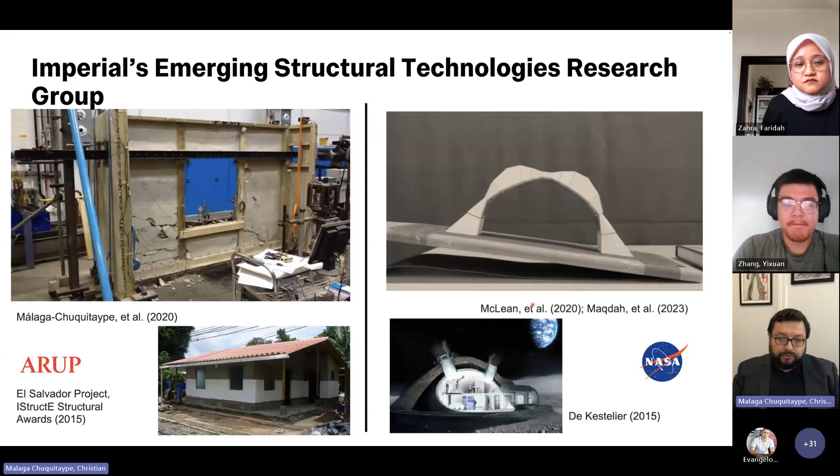And this project went on to win a sustainability award from the IStructE. On the right-hand side here, you can see some of the more recent work we have done in collaboration with Greenwich and NASA, trying to provide optimal solutions for the shielding structures that will be protecting some extraterrestrial assets. We used a number of AI techniques to do that, and subject those models to Marsquakes and moonquakes and things like that.

But throughout our research, we do, apart from the experiments, quite a lot of modeling, notably in steel and timber, but also in other materials. We cover different structural responses, a diversity of structures, bridges, buildings, and so on, different scales from the macro to the micro, from whole structural systems to the interaction between bolts and joints, incorporating blast, fire sometimes, and other forms of extreme loads. Detailed continuum models and also some form of stick frame models of systems.

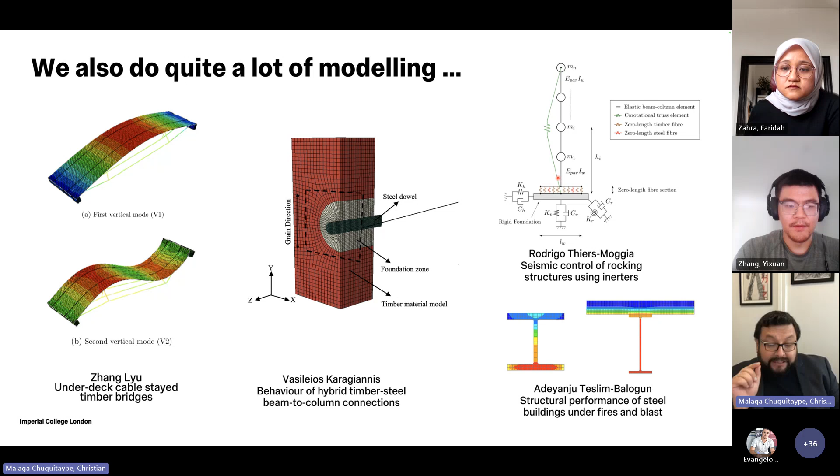Now, modeling is an interesting beast in itself. It has been said by a statistician, and I'm sure many of you have heard this before, that all models are wrong, but some are useful. What that really means is that the ability to set up an analytical or numerical model that can capture the important aspects of the behavior we need to capture to answer a particular question is really the key in all this process of modeling.

So today you will be hearing from two different modeling approaches. First you will hear from Faridah about her work on the provision of hazard-consistent comparisons for performance-based assessment of steel moment frames, where she's trying to answer the question of how much the disregard for the causal relationship that exists between the intensity of the earthquake and the properties, the characteristics of the ground motion, how much that affects our estimates and our predictions.

And then you will hear from Yixuan on the challenges of modeling structures that have a strong nonlinear response, and some of his attempts to model a particular new type of device called the inerter and the clutch inerter in this particular case, through a framework that I think has a great potential to get us a bit closer to the truth in these non-smooth dynamics problems. So without further ado, I will let Faridah start speaking and presenting.

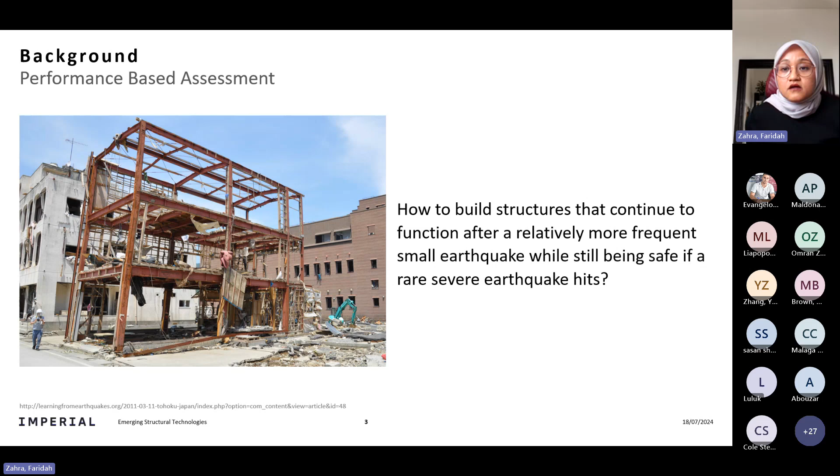This question can be answered through probabilistic seismic demand analysis within a seismic performance assessment framework that is widely known as PBEE. Intuitively, a performance assessment of a structure needs to be based on the hazard at the selected site. However, surprisingly, the available studies on seismic performance assessment were based on a hazard inconsistent assumption.

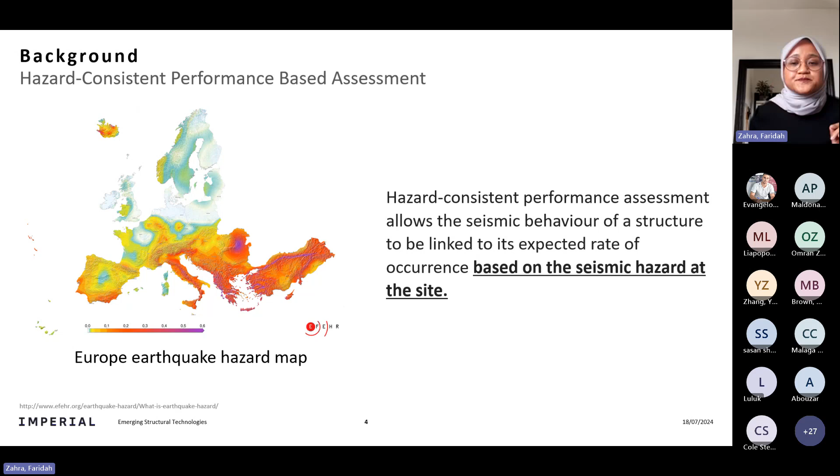So one of the main aims of the study is to stress the importance of having a hazard consistent assessment, which allows the seismic behavior of a structure to be linked to its expected rate of occurrence based on seismic hazard at the site. As mentioned, the hazard consistency in the study is secured through conditional scenario spectra, or CSS.

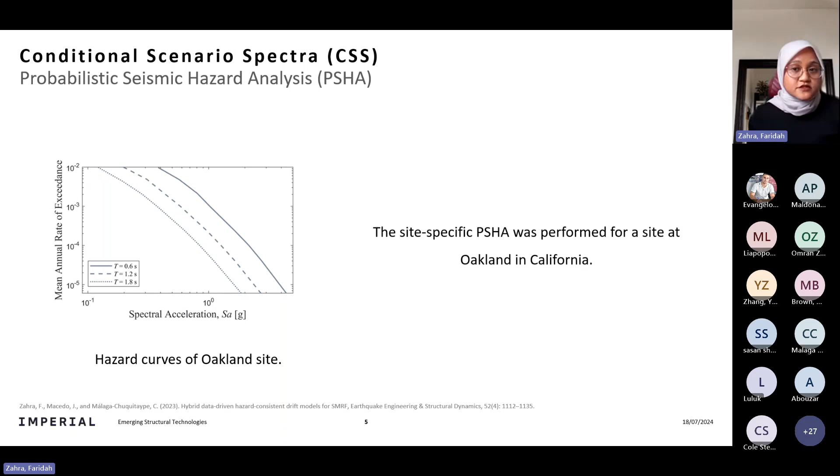The first step of CSS is representing the seismic hazard level at a site by the probabilistic seismic hazard analysis. And the study used the PSHA result of a site in Oakland, California.

In the next step, constructed from the PSHA, the UHS or uniform hazard spectrum is a commonly used target spectrum that assumes equal probabilities of exceedance of spectral acceleration at all periods. However, as this UHS is constructed from the PSHA, it constitutes a composite of all earthquakes that take part in site-specific hazard, but these earthquakes are very unlikely to occur simultaneously, so the UHS does not represent a spectrum of any single earthquake, and none of the single earthquakes is likely to produce a spectrum as high as that of the UHS over a wide range of periods.

So Baker and Cornell developed the conditional mean spectra, or CMS, as an alternative to the UHS. The CMS represents the average spectrum that would occur if the selected spectral acceleration at the reference spectral period occurs. The term conditional refers to the spectrum being anchored at the selected spectral acceleration at the conditioning period, T, and the term mean refers to the mean value of the response spectrum conditional upon the occurrence of the spectral acceleration at the conditioning period.

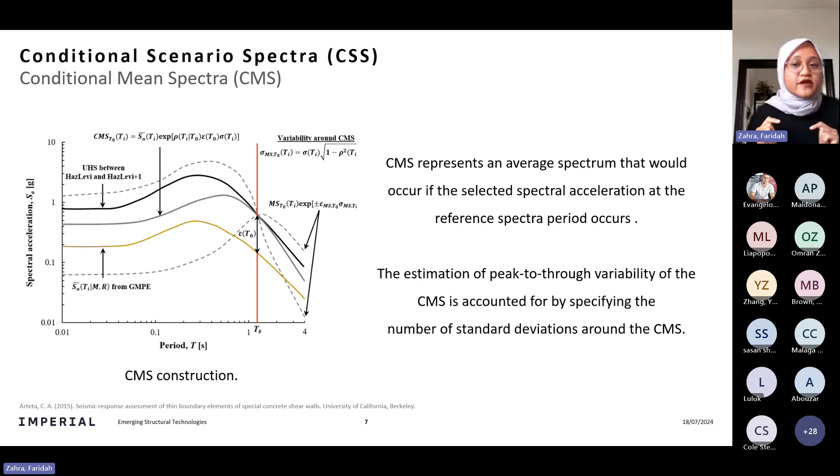The CMS per hazard level is selected from a subset of recordings from the suite of ground motions that we have, scaled to match the CMS and its variability for each hazard level. This method ensures the recordings have the correct spectral shape, accounting for the period-to-period variability of the ground motions. As a result of the CSS methodology, we have a set of realistic earthquake spectra with assigned rate of occurrence based on their spectral shape and intensity.

Based on the PSHA of the site in Oakland, this study selected 596 motion records, where each is assigned a rate of occurrence. These rates of occurrence of this set of ground motions can later reproduce the hazard at the site to prove its consistency.

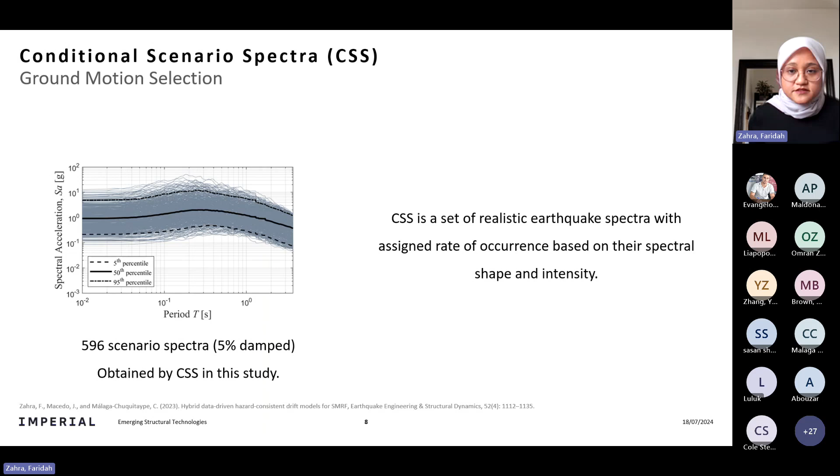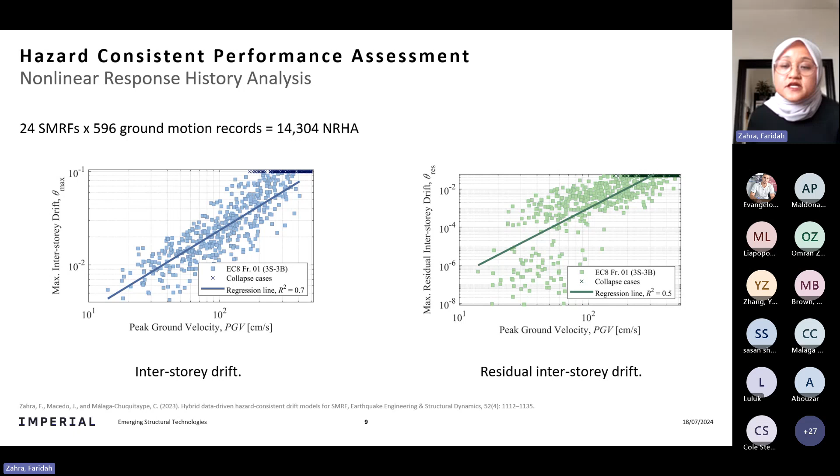As an example of a case study to show the importance of hazard consistency of the analysis, part of our study performed hazard-consistent performance assessment of 24 frames that were run with almost 600 motion records from the CSS using the high performance computing facility at Imperial College London, resulting in more than 14,000 non-linear response history analyses. We then assessed the behavior of the peak, transient, and residual interstory drift as the engineering demand parameters of interest, and also assessed the several patterns found from this response database.

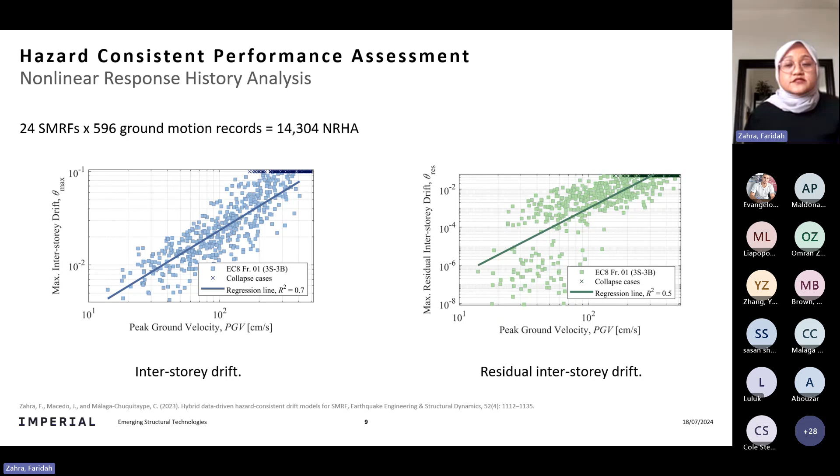We then also developed prediction models for these EDPs based on this extensive structural response database. The process of developing the model and the model itself has been published in a paper as presented here.

An interstory drift prediction model was developed in the study from the structural response database from the NRHA. It was preceded by feature selection with several machine learning algorithms to select the best predictor from the structural and seismic parameters that we have. Then multilinear regression was carried out to develop the model.

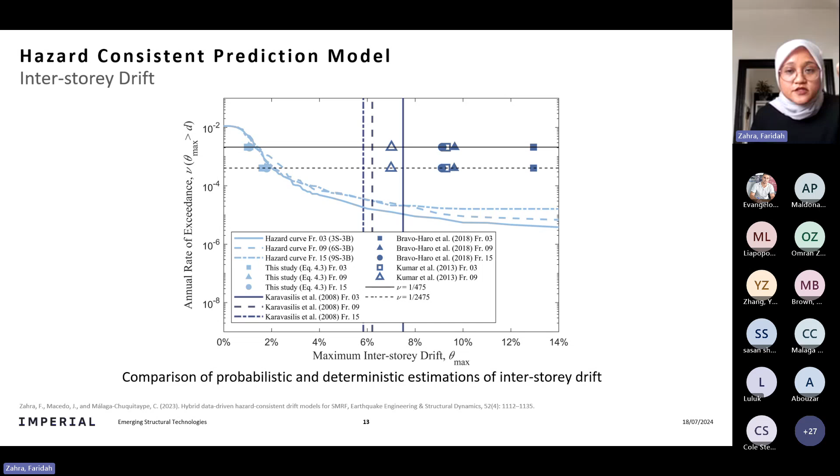In another paper, we also assessed the residual drift demand, which is arguably more important than the peak transient interstory drift demand, as it is actually the structural response that is more practical to measure in a post-earthquake assessment. We also developed the hazard-consistent prediction model of residual drift.

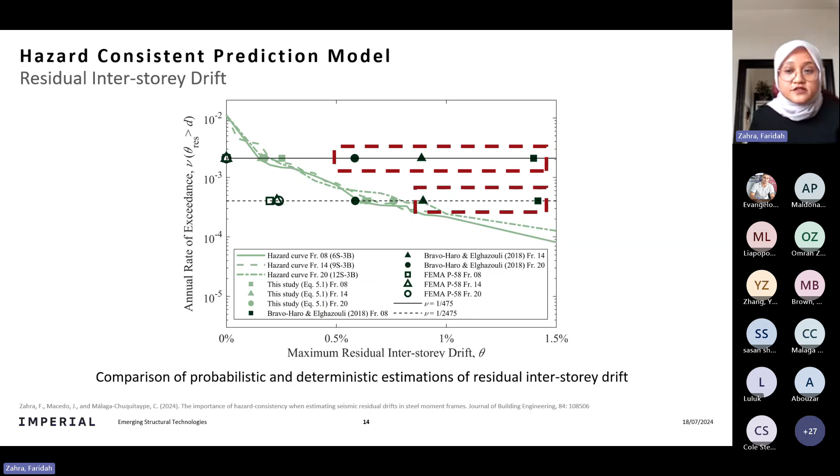As before, the assessment is presented in the form of a hazard curve, and our model is shown to match the actual demand of the frame well and is able to discern different hazard levels. The available non-hazard-consistent demand from FEMA P58, on the other hand, severely underestimates the residual drift demand, and the model from available studies was found to overestimate it. These available studies also cannot distinguish different hazard levels.

While those studies are mentioned shortly, just to show the importance of hazard consistency in the performance assessment of structures, this presentation will focus more on a hazard consistent point of view of available seismic codes.

In the context of steel frames design, available seismic codes require these frames to respect certain maximum transient deformation levels, in addition to having a certain lateral strength under seismic loads. These criteria are prescribed differently in different codes.

A number of differences are found between the current Eurocode 8, which from this point will be referred to as EC8-05, and the revised draft of Eurocode 8 referred to as EC8-23, and the American Seismic Code ASCE 7.

One part of my thesis evaluates the seismic design rules in the current and revised draft of European and American seismic codes within the hazard consistent performance assessment framework, answering the question: will a building at a certain site designed with different seismic codes result in similar structural performance, and will the seismic codes yield well-controlled structural design for all structures for a certain hazard level of a site?

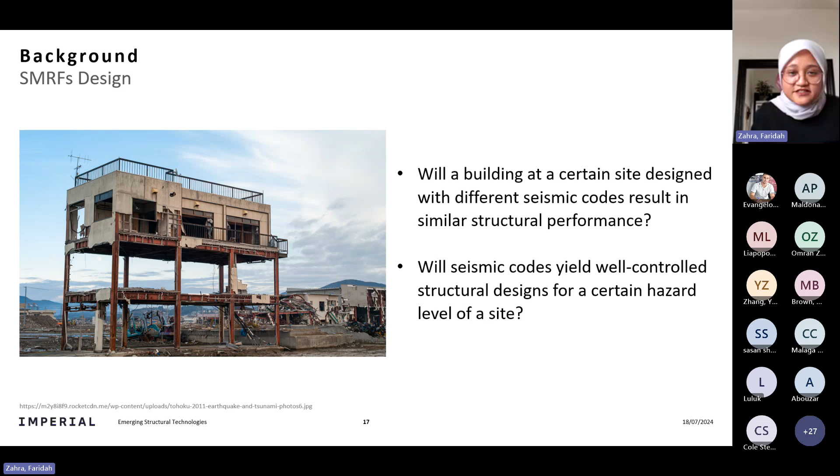Several key differences are found between the design codes and their comparisons, but due to time constraints I won't explain them in detail. The key differences highlighted in this study are their elastic and design seismic spectra, the inter-story drift limits, the capacity design rules, and the second order effects.

Next, we designed a number of frames with each seismic code. First, we designed the frames using a group of elastic spectra for the current Eurocode, the revised Eurocode 8, and ASCE 7, constructed so that they match as closely as possible to the Oakland spectrum from the UHS at 500 year return period, for the range of structural period of interest.

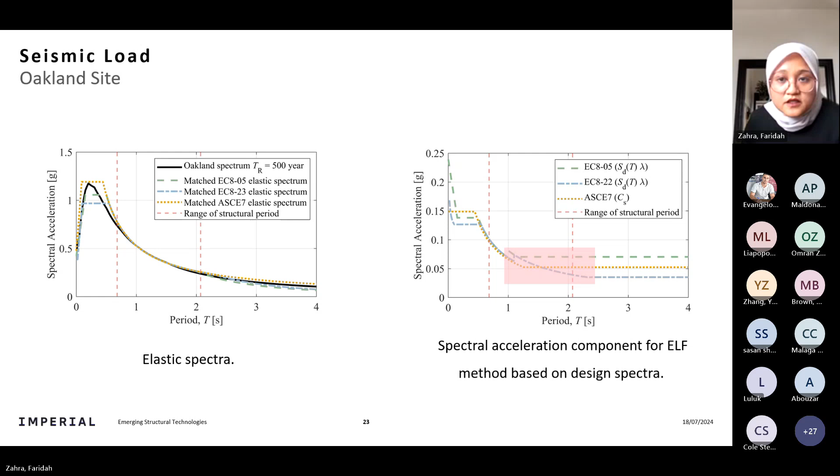Based on the seismic shear, three families of frames are designed according to the current Eurocode, the revised Eurocode 8, and ASCE 7, with different numbers of stories and different numbers of bays. 16 frames are designed for each code, resulting in 48 frames overall.

These frames were designed with the help of a tool called Automated Seismic Design and Analysis, or AutoSDA, developed by Xingquan Guan and Professor Burton from University of California for ASCE 7-based frame design. This Python-based framework was modified in the study to incorporate the European rules.

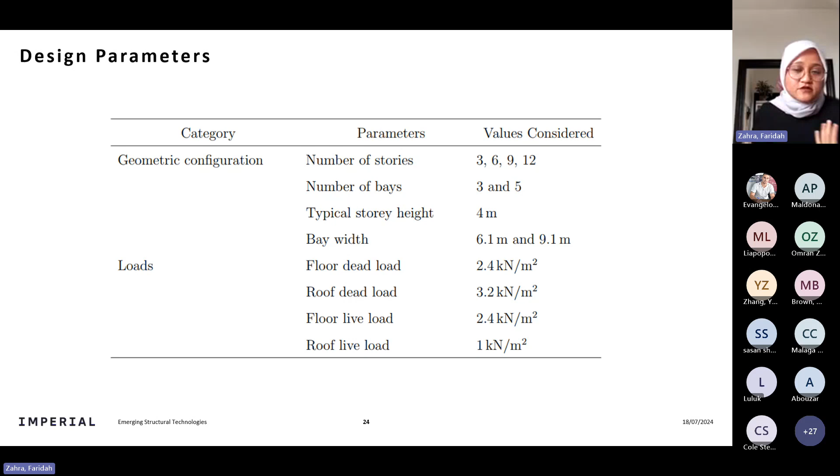AutoSDA is a Python-based platform that automates seismic design. It works by trying the biggest possible fill section for the frames and reducing those sections until they are optimized as small as possible, based on satisfaction of relevant design constraints and also constructability constraints.

As expected from steel frames, all designs are governed by the drift. Here is presented the weight of the frames normalized against the weight of the current Eurocode frames for all 48 frames. Overall, the weight of the frames based on the revised Eurocode is slightly reduced from the current Eurocode, shown here with the blue bars.

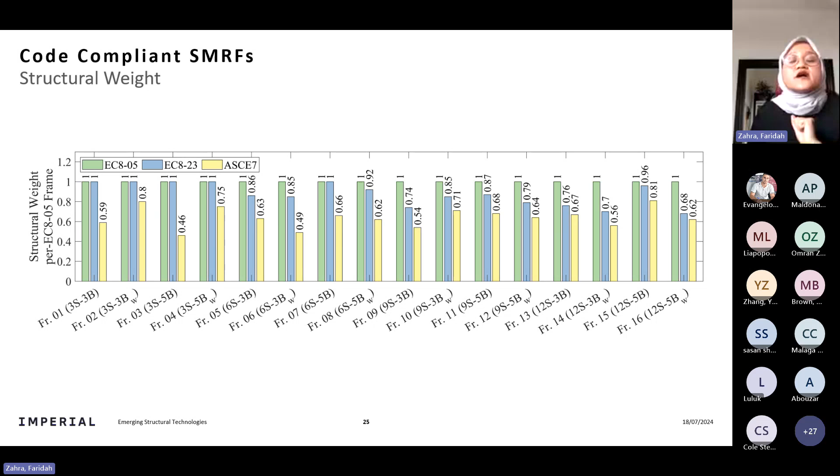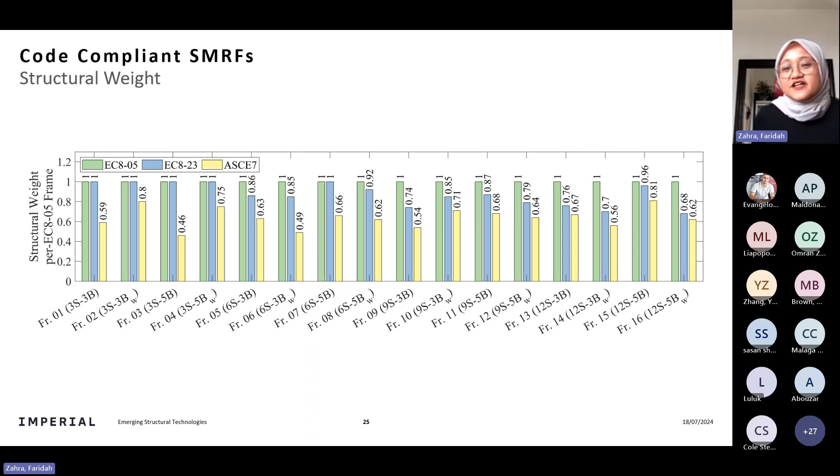The ASCE frames, on the other hand, result in the lightest frames, down to 46% of the weight of the current Eurocode frames, due to the lax strength and drift limit in ASCE 7.

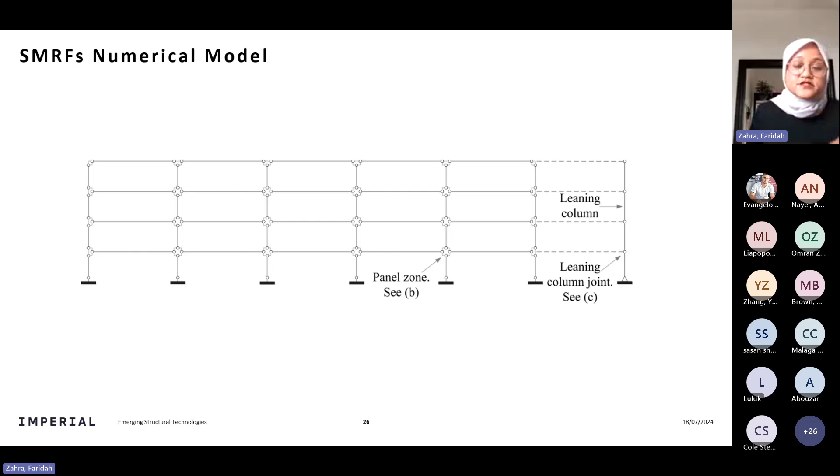All frames were modeled and analyzed in OpenSees. The frames were modeled following a concentrated plasticity approach, with elastic beam column elements connected by a rotational spring representing the potential plastic hinges at the beam column connection. The panel zone here shows the detail of the spring model adopted, which follows the bilinear hysteretic response based on the modified Ibarra-Medina-Krawinkler deterioration model.

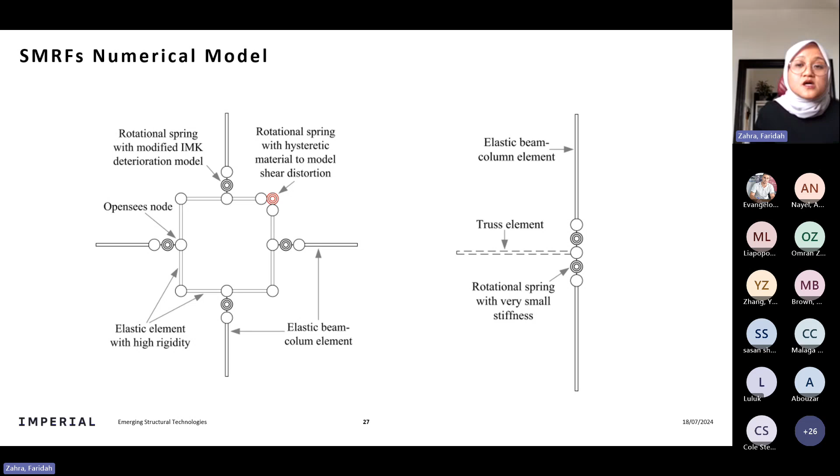As an example, here is the illustrative hazard curve of two frames designed with different seismic codes. It can be seen that both frames hold the same pattern, where the current Eurocode frames have the lowest interstory demand, followed by the revised Eurocode 8, and then the American frames experience the highest demand.

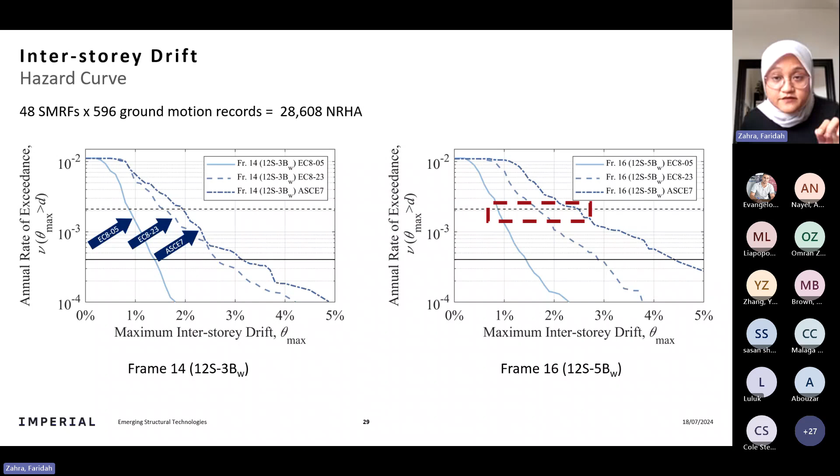From this hazard curve, the associated maximum interstory drift at the life safety performance level and the collapse prevention performance level for each frame are collected to be compared. These values in this bar chart are the corresponding interstory drift demand of each frame. For example, here is frame 1 designed by the current Eurocode, revised Eurocode, and American codes for the life safety performance level. We also obtain the corresponding demand for the collapse prevention performance level for all frames.

Presented here as well in this chart is a horizontal line marking the maximum drift limit for each performance level based on FEMA P58, which is 2.5% for the life safety performance level and 5% for the collapse prevention performance level. All frames here are shown to be safely within the prescribed limits.

However, one thing that can be seen from this graph is that both European and American codes are found to be unable to ensure a consistent demand at both performance levels. For example, the current Eurocode shows that the interstory drift demand varies between 1.3% to 2.2%. And the ASCE 7 has the most inconsistent demand, between 1.9% to 4.6%, at the collapse prevention performance level.

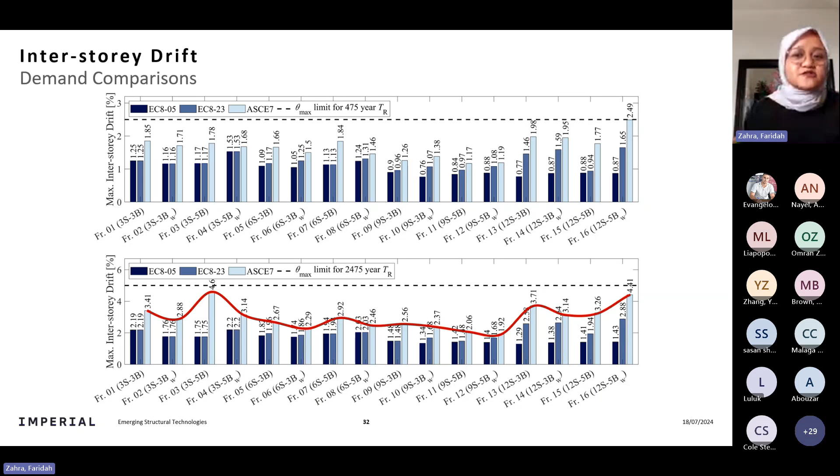It is to be noted that it is desirable that code-compliant design will result in well-controlled responses, where similar demands are expected at a certain performance level on all structures, depending mainly on the function they're designed for, keeping all things being equal.

To compare between each code, it can be clearly seen that the current Eurocode takes a very conservative side, where the average interstory drift demand at life safety performance level is only 1%, which is 40% of the limit. At the collapse prevention performance level, the average demand of the current Eurocode is 1.7%, which is 34% of the limit.

For the revised Eurocode, although the design rules have undergone many changes from the current Eurocode 8, the ensuing designs are still conservative. The average interstory drift demand for the life safety performance level is found to be 1.2%, and 2% for the collapse prevention performance level. These demands are very close to those of the current Eurocode 8, although there are some considerable differences in taller frames.

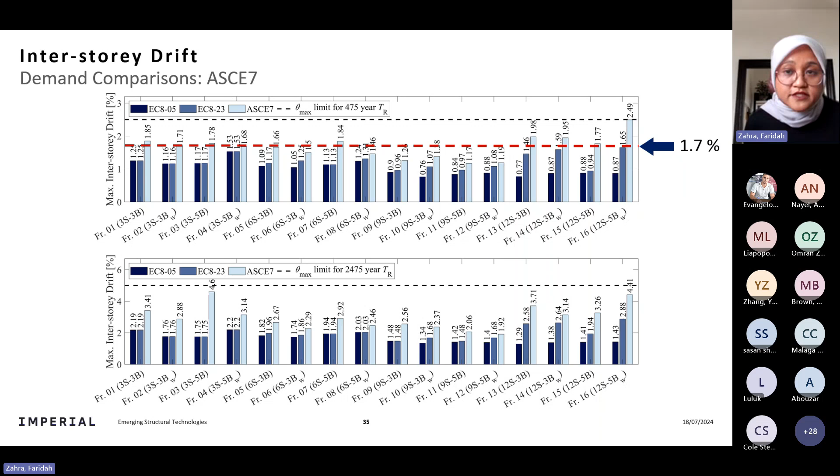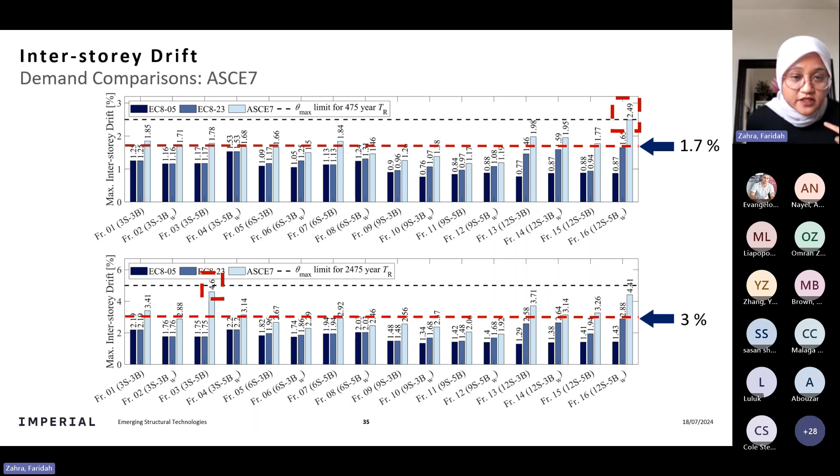On the other hand, the American frames have the most optimum design, where the average interstory demand at the life safety performance level is 1.7%, which is 70% of the limit, with frame 16, 12 stories, reaching the exact limit at 2.49%. At the collapse prevention performance level, the average interstory drift demand of American frames is 3%, which is 60% of the limit, with the highest being frame 3, with 3 stories, at 4.6%.

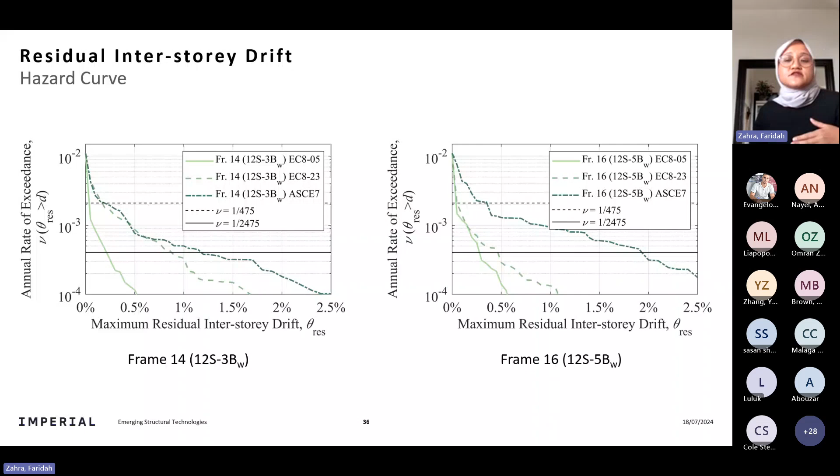We also assess the residual drift demand for all frames. Presented here, as before, is the hazard curve of several frames designed with different seismic codes. Similarly with the interstory drift demand case, it can be seen that the current Eurocode has the lowest residual drift demand, followed by the revised Eurocode and the ASCE 7.

From the perspective of design rules consistency, the ASCE 7 shows the largest variability in demands, where the residual drift demand of the frame can be as low as 0.26% and up to 2.4% at this collapse prevention performance level.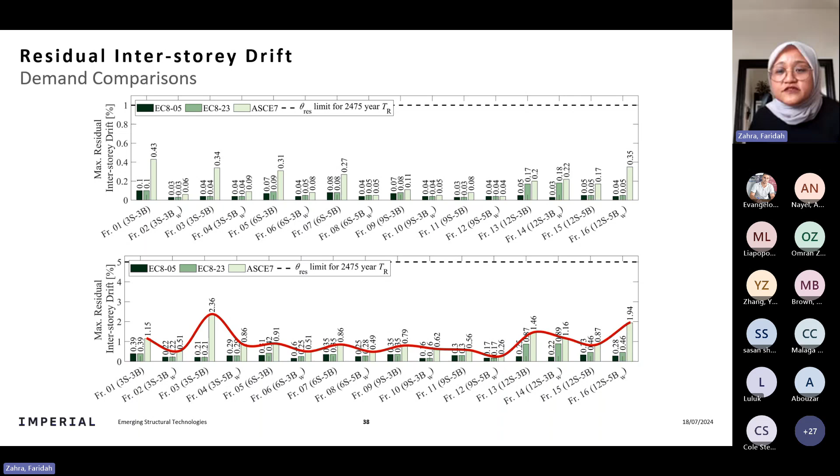On the other hand, the current Eurocode and the revised Eurocode consistently show very low residual drift demand, denoting conservative design. The cautiousness of the current Eurocode design is shown by its very low residual drift demand, only up to 0.4% at the last performance level, and the revised Eurocode demands virtually the same as the current one in frames up to 9 stories.

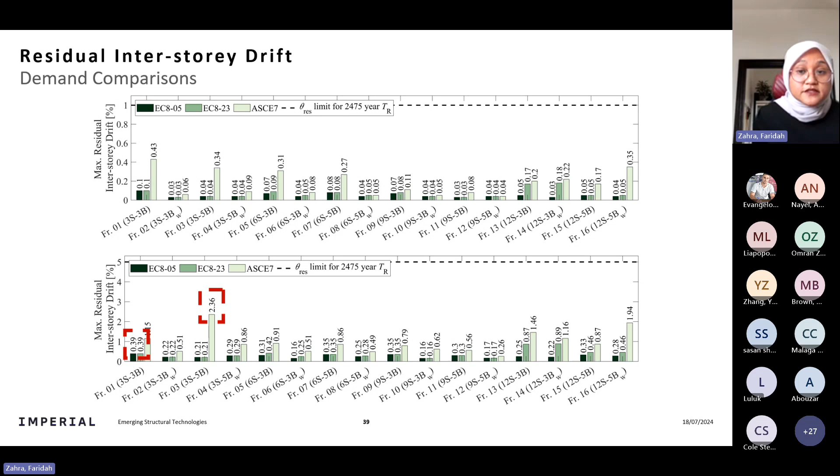Noting once more that the changes in the revision of Eurocode 8 do not lead to significant changes in the expected structural performance. The American frames, on the other hand, still have the highest demand, at almost half of the limit here for frame 3, which is 3 stories.

So in conclusion, from the first part of the presentation, we show that hazard consistency is essential to obtain meaningful results from our seismic analysis, and not considering the causal relationship between the intensity of the motion and its characteristics can lead to a severe misrepresentation of the actual seismic response.

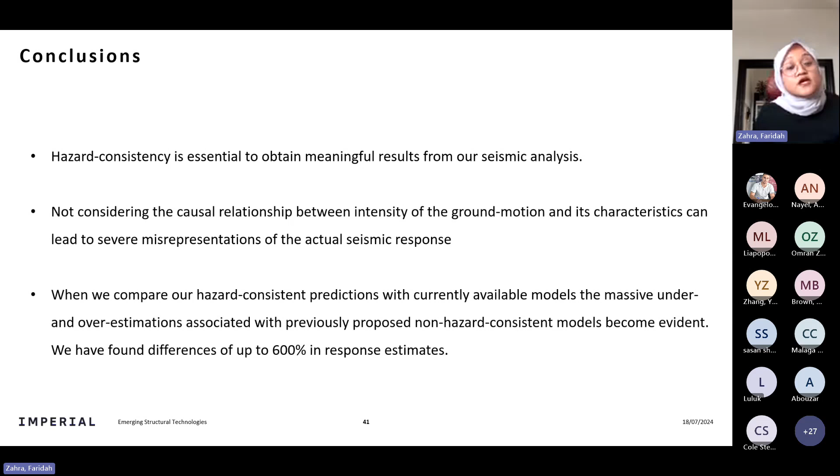When we compare our hazard consistent prediction with currently available models, the massive under- and overestimation associated with previously proposed non-hazard-consistent models become evident. We have found differences of up to 600% in response estimates.

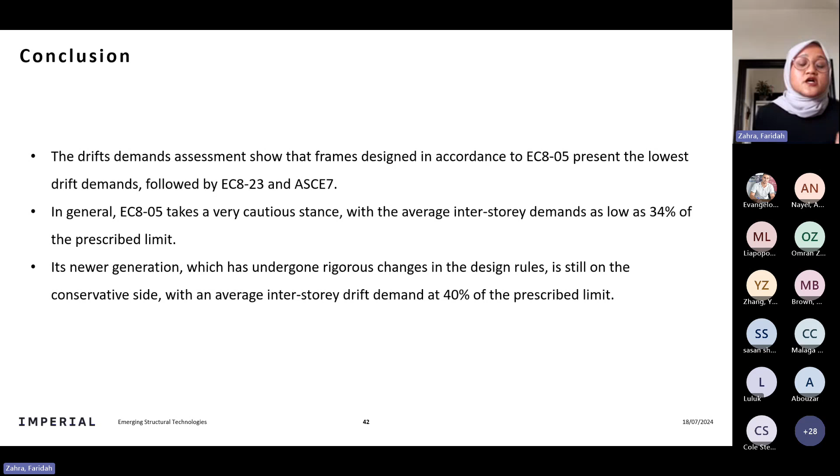From the seismic code comparisons, we found that the drift demand assessment showed that frames designed in accordance with the current Eurocode 8 present the lowest drift demand, followed by the revised Eurocode 8 and ASCE 7. In general, the current Eurocode 8 takes a very cautious stance, with the average inter-story demand as low as 34% of the prescribed limit, and its newer generation, which has undergone rigorous changes in the design rules, is still on the conservative side, with an average inter-story demand at 40% of the prescribed limit.

The American code, on the other hand, results in the most optimum design, where the average inter-story demands are 70% for the life safety performance level and 60% for the collapse prevention performance level. One thing to be noted as well here is that when contrasted with our EDP hazard curves, our results highlight the inability of all mentioned seismic codes here to control structural response, leading to similar structural demands for all structures regardless of their function and how they were designed at a certain return period.

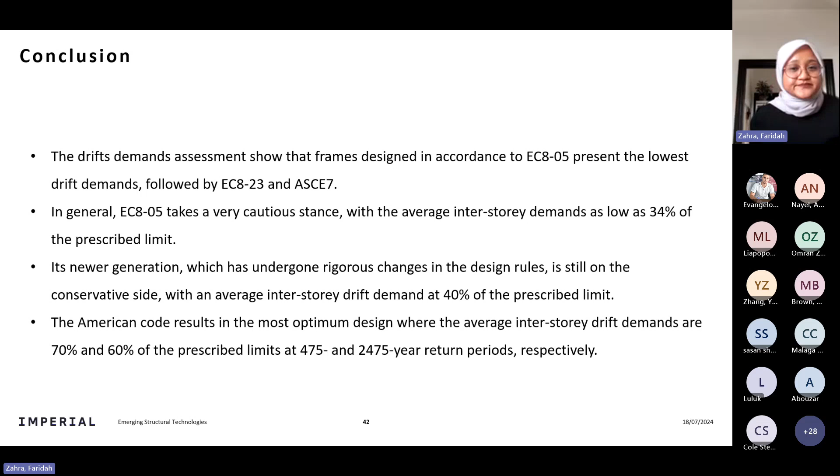Okay, that's all. Thank you very much.

I will listen here to Christian then. Yeah, maybe Yixuan, can you start? Thank you, Faridah. Hello. Hello. Okay. Shall we start? Yes. Yeah.

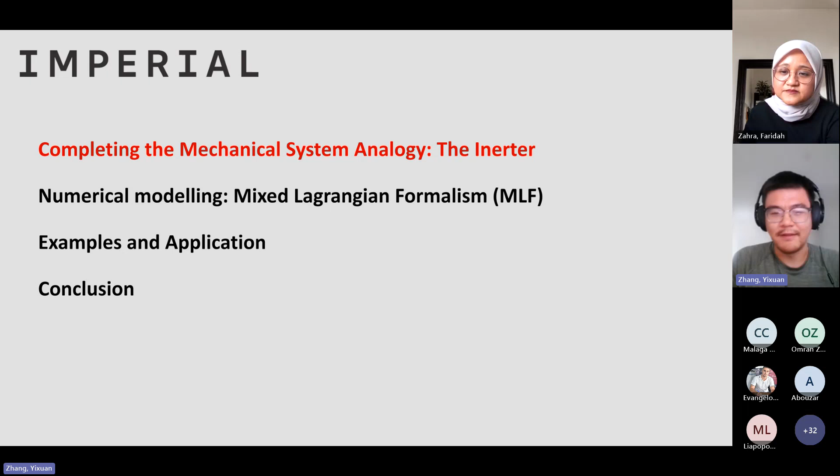Hi everyone, I'm Yixuan, a second-year PhD student from Imperial College, and I will talk about modeling structures with clutch inerter devices. My presentation will be divided into 4 parts. First, I will introduce the inerters and the numerical modeling techniques, and the numerical model is then demonstrated by examples and its applications on a rocking structure. The last part is the conclusion.

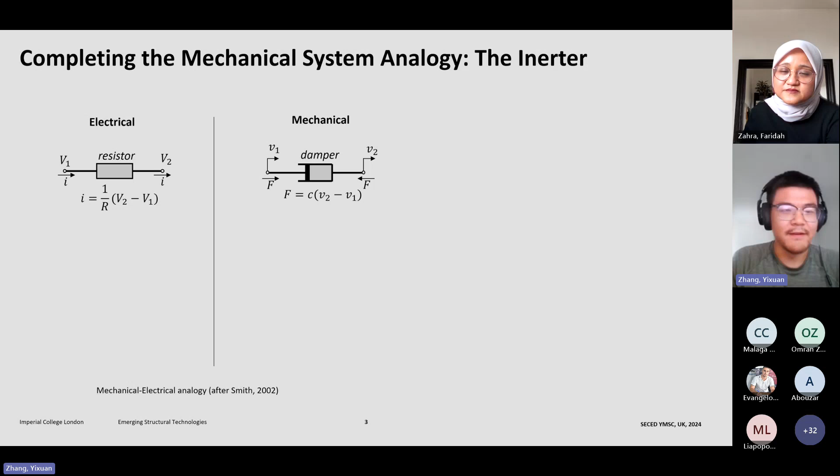Let's start with an analogy between mechanical systems and electric circuits, since they share the same differential equation. In this analogy, the damper is equivalent to a resistor; correspondingly, in practice, we have velocity-based devices like viscous dampers. The spring is equivalent to an inductor, and we also have displacement-based devices like yielding plates or frictional dissipators. And how about the capacitor? It refers to the inertia term of the equation. Is it equivalent to gravity mass? No, a mass has only one terminal. The real equivalent is the inerter, a novel device that can output force proportional to the relative acceleration of its two terminals.

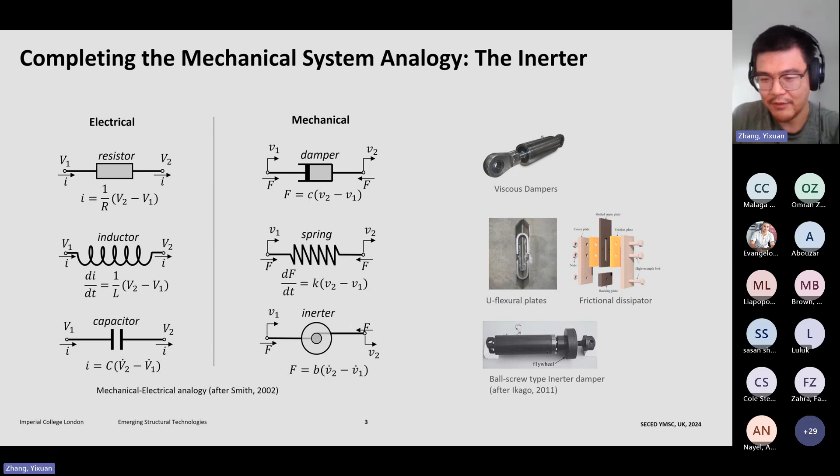The name and concept of the inerter was initially proposed by Smith in 2002. After that, in 2005, it was introduced into Formula One racing by the McLaren team, where it is well known by the public as the J-damper. Unfortunately, due to its extraordinary performance, the use of inerters was banned in the game 2 years ago.

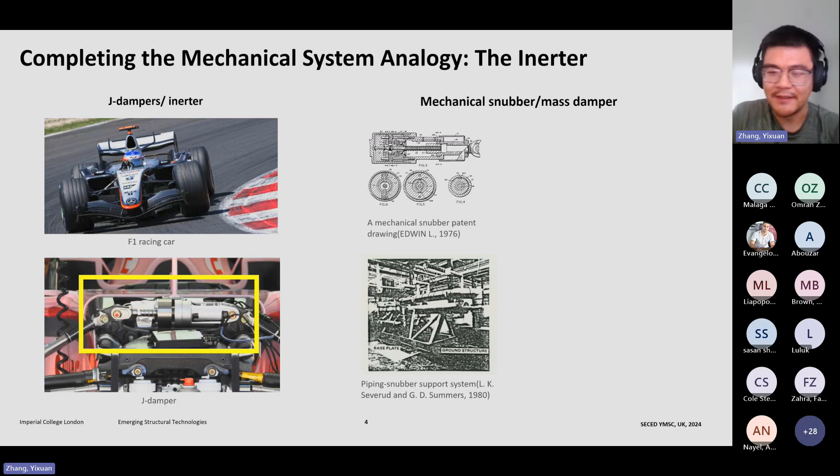However, earlier in the 1970s, similar devices were already proposed and applied for protecting piping systems against impact in nuclear plant facilities, under a different name called snubbers. The first prototype of the inerter in the civil engineering field was designed and tested by Arakaki in 1999, and until now, the real application of inerters in seismic control is still limited. One well-known example is the tuned viscous mass damper used in a commercial building in Japan.

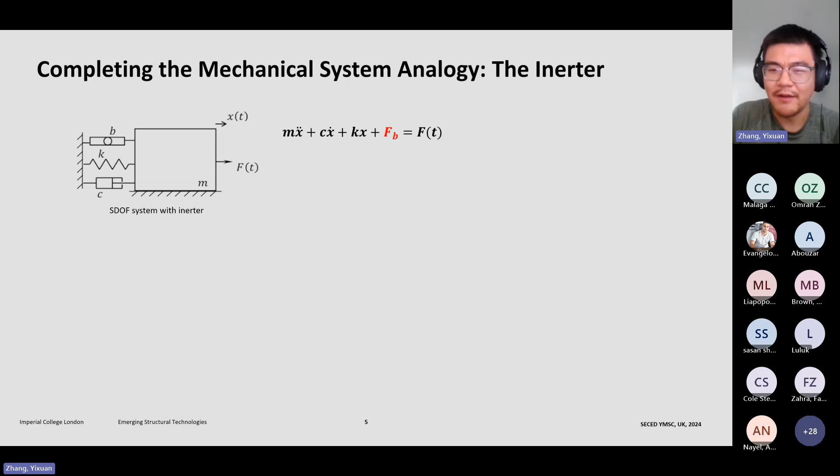So how does it work? In a single-degree-of-freedom system, we have its governing equation with an additional term for the force from the inerter. According to the definition, the force is proportional to the relative acceleration, and the coefficient is called the inertance of the inerter. If we rearrange the equation, we find that the inerter directly modifies the mass term of the equation of motion. And how does the inertance come from?

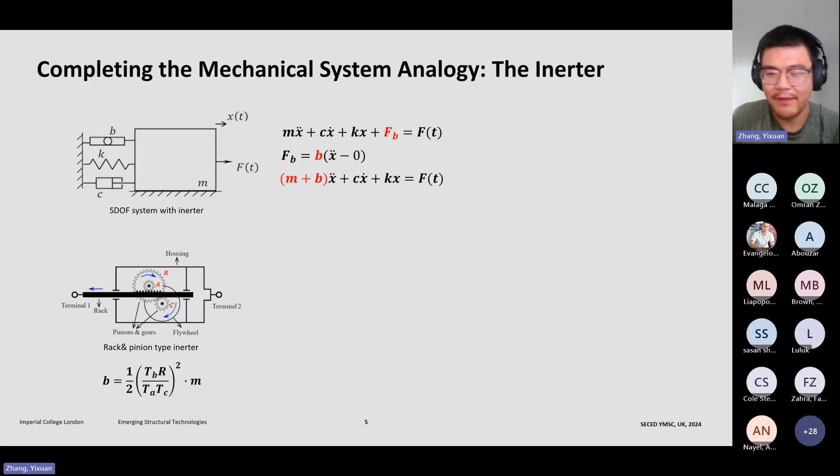Usually, for mechanical inerters, the translational movement is converted into a rotation of a flywheel, just like here, the rack and pinion type inerter and ball screw type inerter. So the translational movement will be converted into a rotation of a flywheel inside these kind of devices.

Take a ball screw type inerter as an example. If we have a flywheel with radius of 10 centimeters and the ball screw lead of 1 centimeter, then the inertance will be 1,000 times its self-weight, which means you get additional force without increasing the self-weight of the structure.

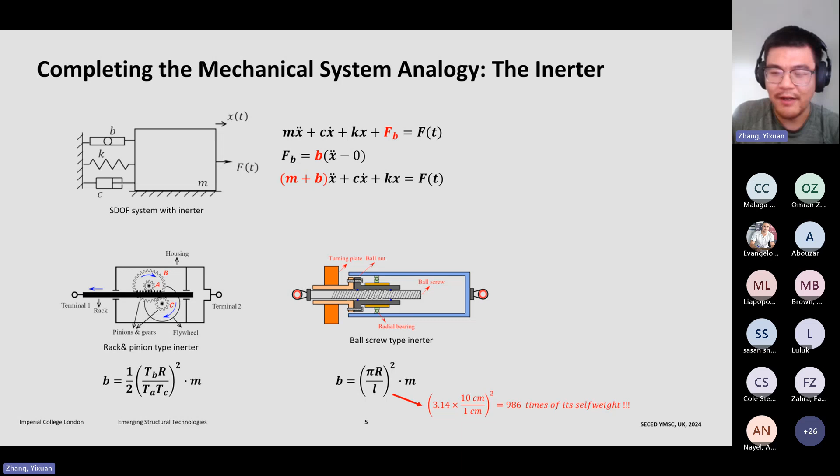So it's way more efficient than the tuned mass damper.

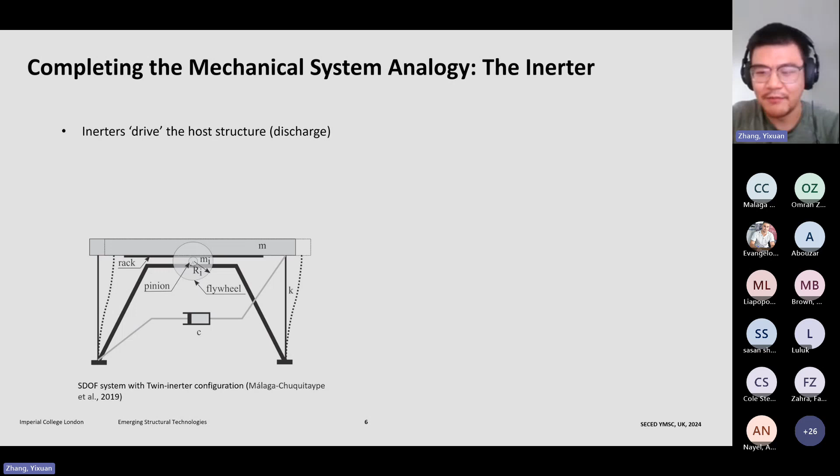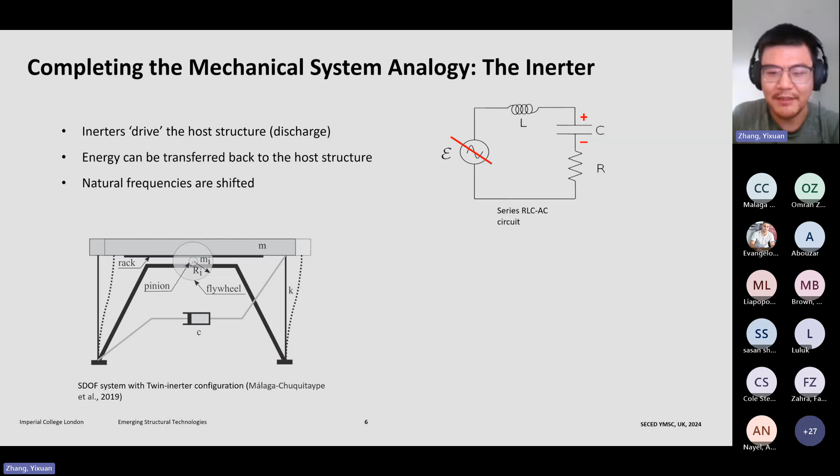But there are drawbacks of pure inerters. Many studies revealed that the inerters can drive the structure as a power output, like a discharging capacitor. The inerter can only be effective when connecting to other energy dissipating devices like dampers. Furthermore, because it directly enhances the mass matrix, the natural frequency of the structure will be significantly shifted.

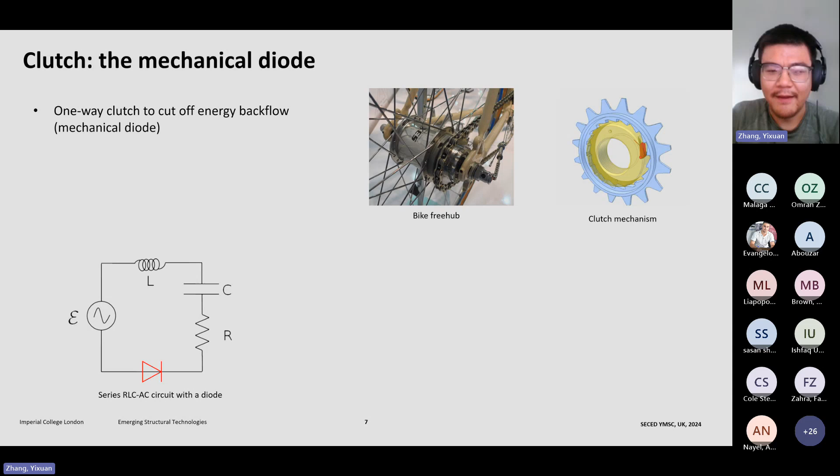Therefore, a clutch is introduced to allow the inerter to disengage with the structure. The clutch is passively working, just like a mechanism in a bike free hub or a diode in an electric circuit. It will cut off the energy backflow. And it has been proved that the structure equipped with clutch inerter has faster attenuation during the free vibration process.

And based on the one-way transmission of the energy, it is feasible to construct a flywheel-based energy harvesting system. The energy will be stored in the flywheel of the inerter.

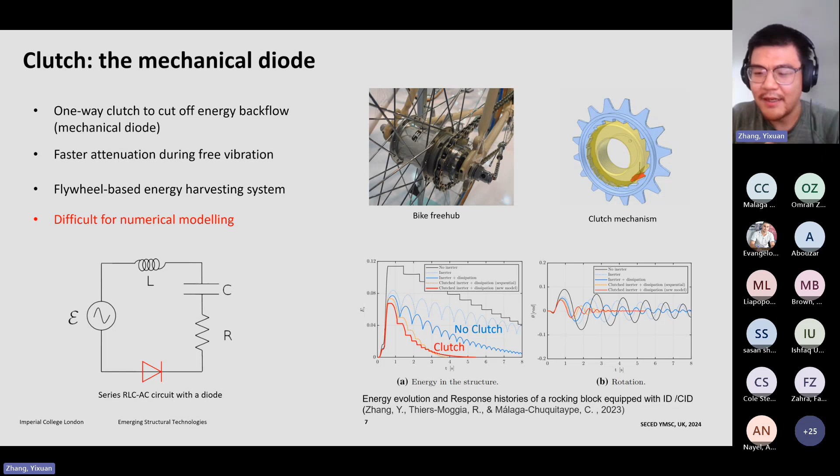However, the introduction of a clutch results in discontinuity of the system behavior, because now the system has to switch between two states, the engagement state and disengagement state, and the transition is not smooth. Regarding the numerical modeling, the numerical model needs to be able to deal with that discontinuity.

So our study is focusing on the numerical modeling of the clutch inerters. We have some existing methods, but they all have limitations.

The first one is the simplified sequential model. It is proposed when the clutch inerter is invented. In this model, the inerter is not explicitly modeled, actually. It simply assumes that the inerter disengages with the structure when the structure is decelerating, and that the inertance of the inerter becomes zero. In other words, for each new engagement after the previous disengagement, the structure engages with the inerter at zero speed.

Therefore, the assumption behind this is that the inerter will dissipate all the energy before the next engagement. It's not realistic. In case of a high-frequency structure equipped with very big inertia, this assumption means that the inertia needs to dissipate massive energy within a very short period. It greatly overestimates the dissipation of the inerter.

So we have a displacement-based contact model. It explicitly models the rotation of inertias, involving an additional set of equations and contact laws for describing the interaction between the structure and the inertia. But the problem is that the rotational displacement of the inertia monotonically increases while the structure is reciprocal. It is hard to obtain the displacement penalty contact between the two motions.

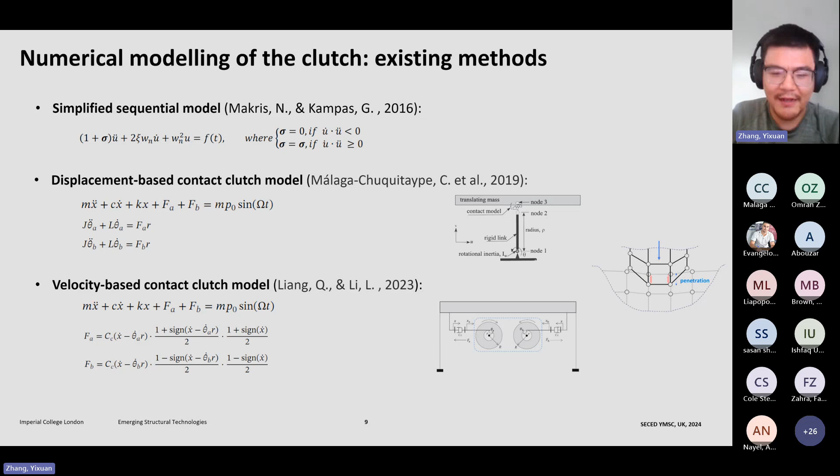Alternatively, we use mixed Lagrangian formalism, which is proved to be very robust and efficient for modeling non-smooth behavior. I'm not going to get into the mathematics of this method, but just some general features.

So MLF is a flexibility-based method. In MLF, we are going to solve two sets of equations, the equation of motion and the velocity compatibility equation. But the key is that we're not going to solve it directly. We solve the weak form of it, which is the optimization problem. And this optimization problem has a quadratic structure, which means it's convex. It's always convex, you can always find the global minimum of it. And that's how it's stable and robust.

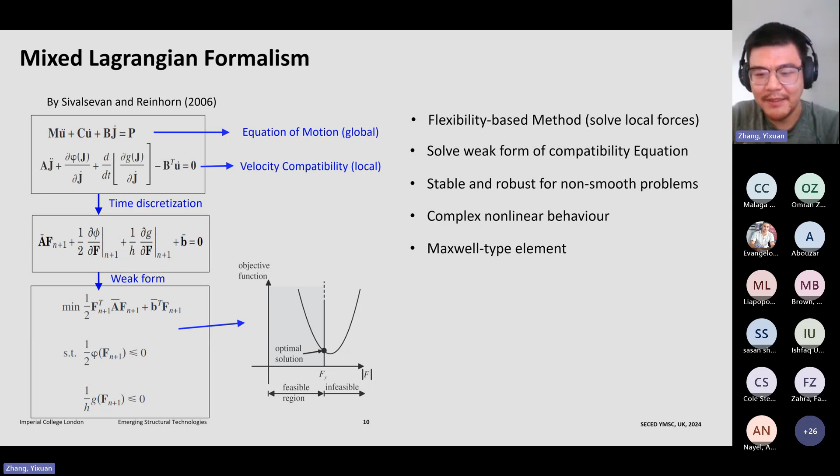And the complex nonlinear behavior can be implemented by modifying the constraints of the optimization problem. And it also uses, because it's a flexibility method, it uses a Maxwell type element, which means all the basic units are connected in series. You can model complex series behavior with only one element.

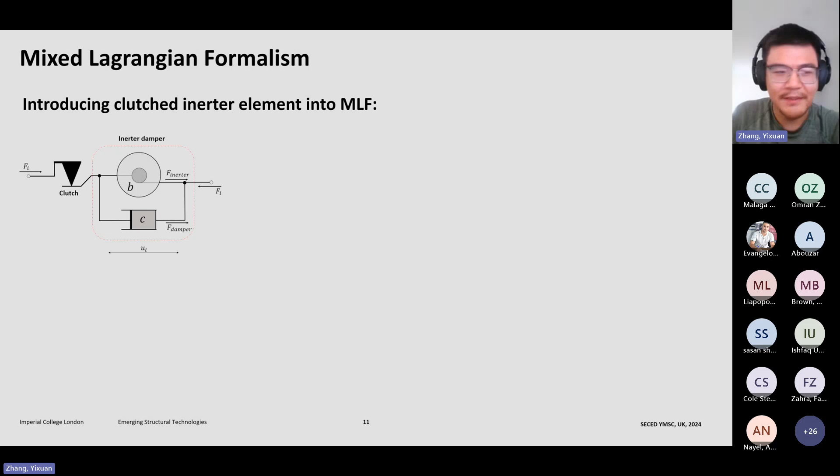So based on that, we built a clutched inerter element in the MLF framework. We start with the energy in the inerter by its definition and apply the mixed Lagrange differential with respect to both the global displacement and local force coordinates. The following expressions are obtained.

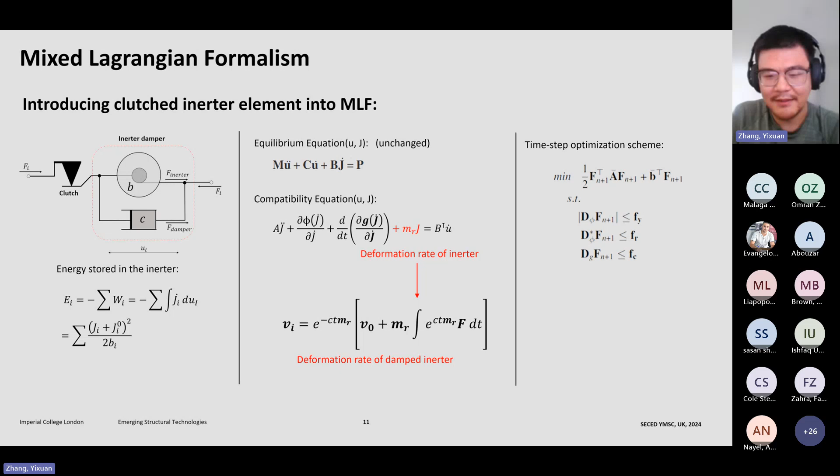And then I'll propose some examples for validation. To demonstrate our formulation, we use this single-degree-of-freedom system, and on the right is an equivalent model built in OpenSees using the penalty method for comparison.

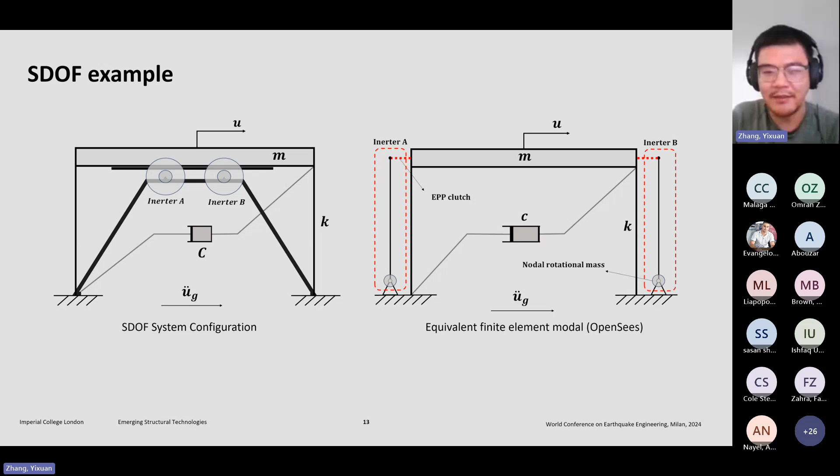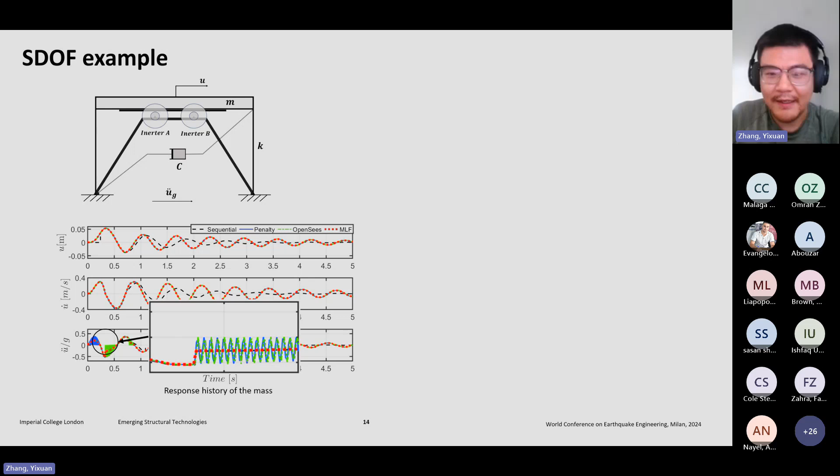And you can see in the acceleration response, all other models have significant numerical oscillation except the MLF.

And furthermore, we want to know whether the proposed model should be able to handle a larger scale system.

As we discussed, we compared the computational performance of MLF and OpenSees models through this 10-story moment resisting frame as a benchmark. This 10-story frame with lumped plasticity with ideal elastoplastic behavior and twin clutched inerters are deployed at each story. The side column accounts for the P-delta effect.

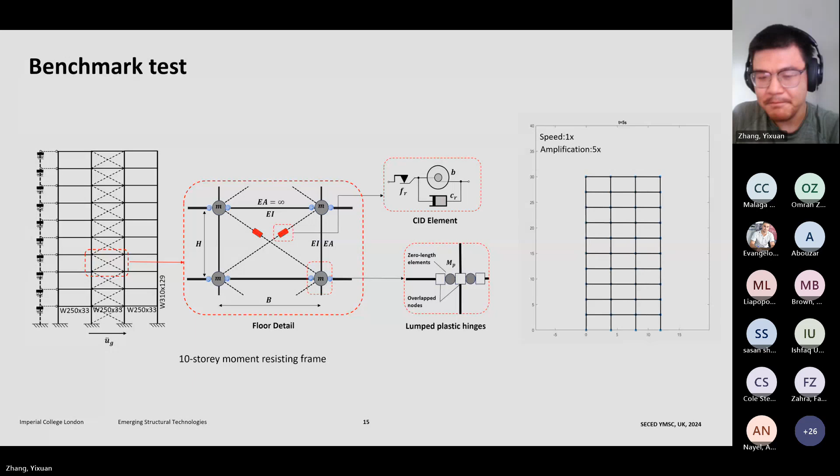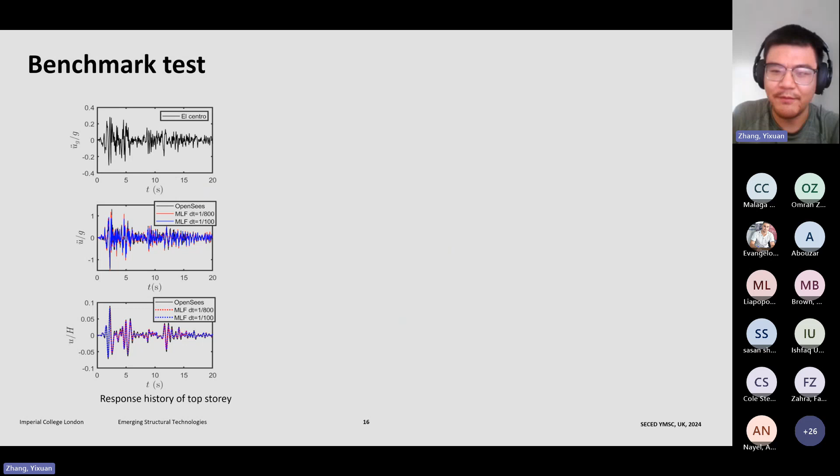And here's the response history of the top story results predicted by the OpenSees model and the MLF model. They generally agree with each other.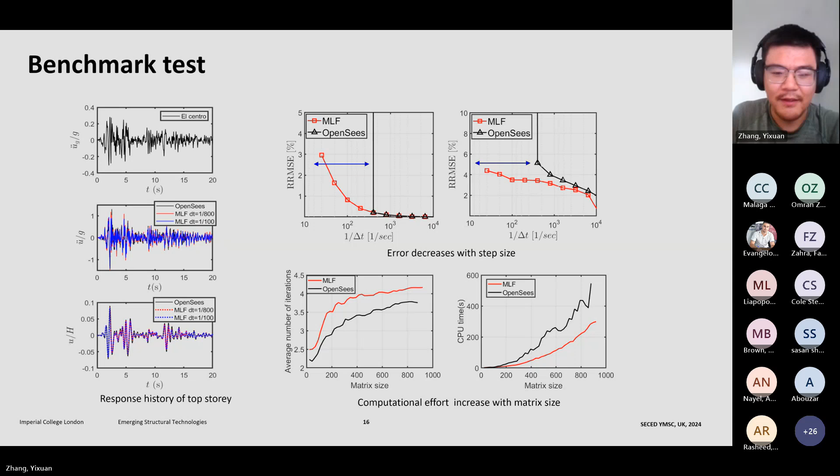And before getting to the next example, I would like to introduce rocking structures. When people talk about rocking structures, it refers to a structure whose base is not fixed to the ground, like what people did in ancient times.

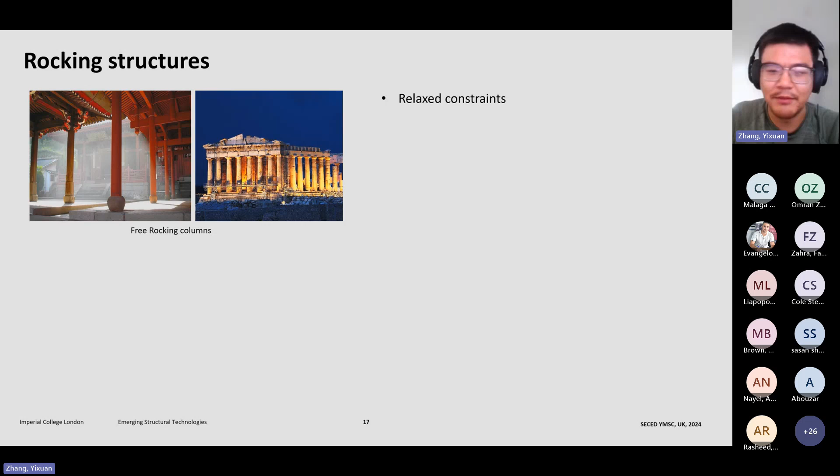Nowadays, to enhance its performance, people use post-tensioning cables to provide additional restoring force. Why are rocking structures preferred? Because it releases the moment in the structure members, leading to less residual strain or damage, as you can see in the hysteresis curve. Therefore, it has other names: damage-free structures or self-centering structures.

For low intensity earthquakes, it behaves in the same elastic way as a normal building, but in case of strong ground motion, it allows the base to uplift, and the dynamic behavior of the building will be dominated by the rocking mode, which is like a safety fuse. In this case, since the deformation is concentrated at the rocking surface, it provides a favorable location for seismic control devices like the clutched inerter.

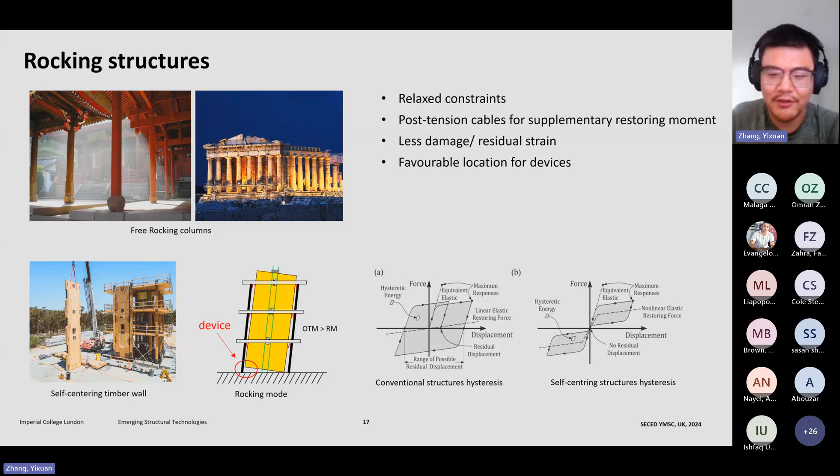The drawbacks of the rocking structures are obvious: there is a risk of overturning because it frees the base constraint. It will have larger displacement, and many research works also address the local failure problem.

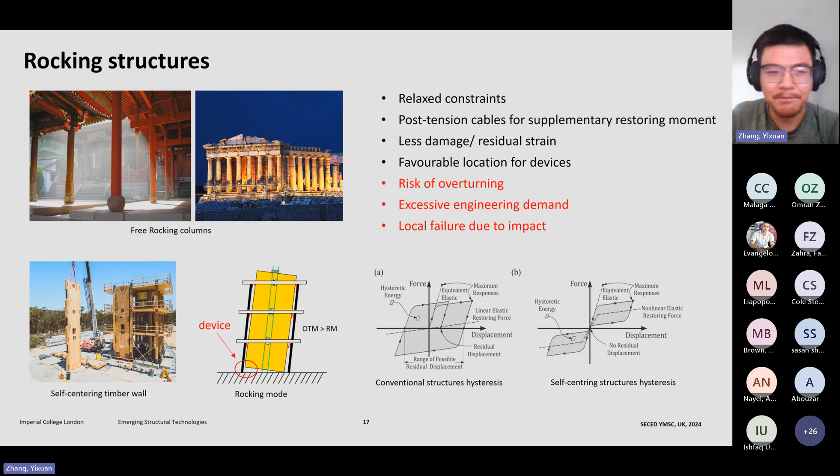So based on this, we propose a numerical example of a self-centering concentrically braced frame. We would like to see whether and to what extent the inerter is effective in controlling the rocking mode. This 10-story structure has 3 rocking surfaces at the 5th, 2nd, and ground floor, with inerters and energy dissipators deployed at each rocking floor.

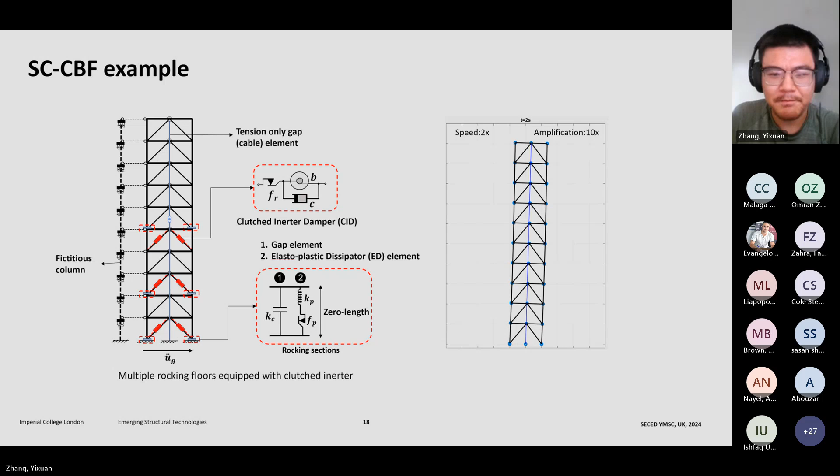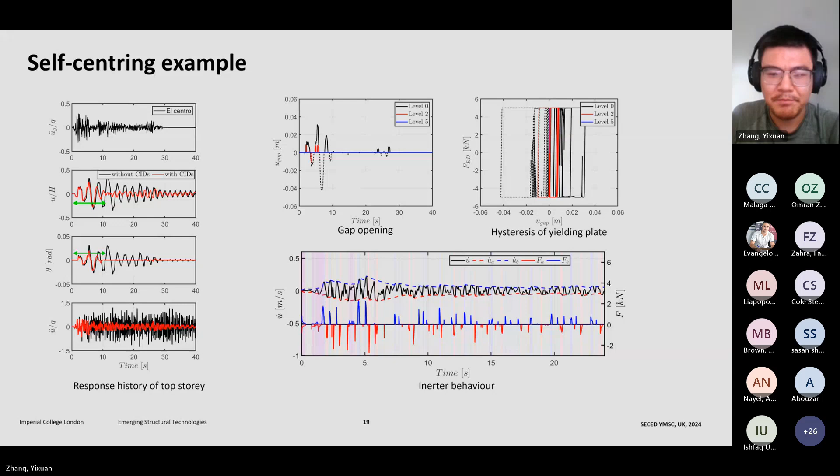To gain a more comprehensive understanding of the effectiveness of the inerters in suppressing rocking structures, a CSS assessment of the proposed structure is also conducted. Here, the same size of records and same settings are considered as before.

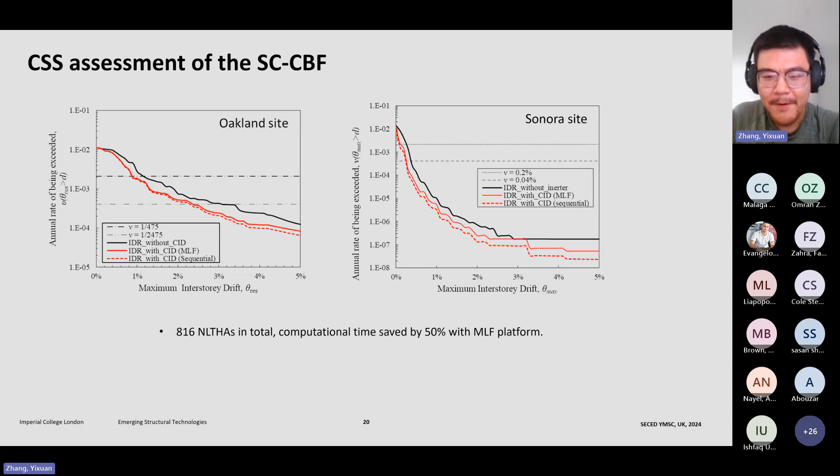Firstly, with the help of the MLF platform, the computational time is reduced by 50%. That's really efficient. And as we can see, the clutched inerter reduced the maximum inter-story drift in all range of the annual rate of exceedance.

Additionally, I draw the response predicted by the sequential model. We can see that the sequential model overestimates the reduction effect of the inerter. The result of it is not conservative.

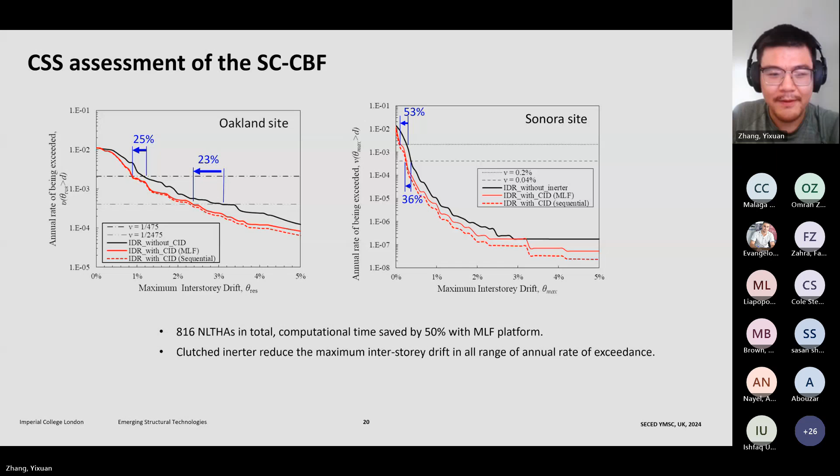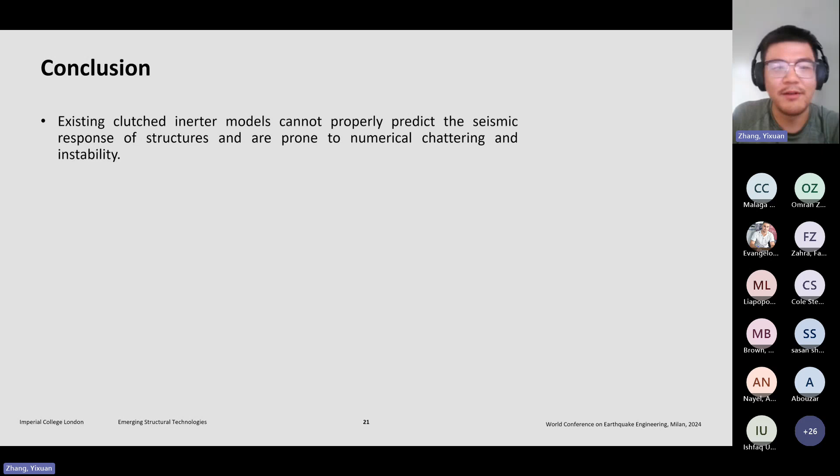And here's a conclusion. Firstly, the existing clutched inerter model cannot properly predict the seismic response of the structure and is prone to numerical chattering and instability. Secondly, we propose a new modeling strategy using the MLF framework, and it has significant advantages in computational efficiency and robustness.

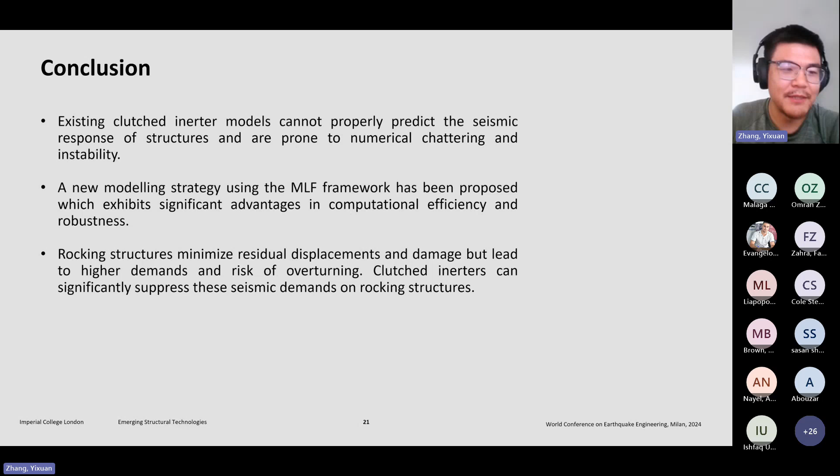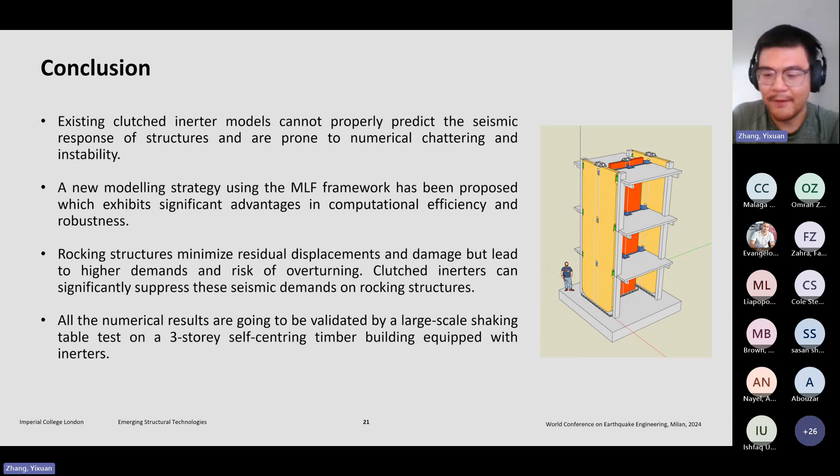The rocking structures minimize the residual displacement and damage, but lead to higher demands and risk of overturning. But the clutched inerter has great potential to suppress these seismic demands. And currently, we are working on a large-scale shaking table test to validate the numerical model. Thank you for listening.